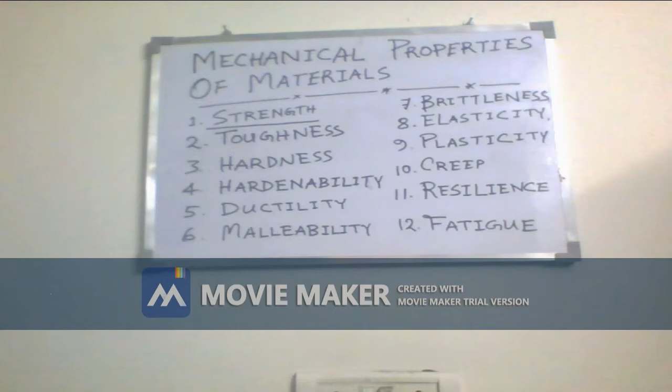So at first we have to know about strength. What is strength? Strength means the property of a material by virtue of which the material can oppose the deformation or breakdown of itself in presence of external force and load. This sentence is very lengthy, so in short, how can we remember it?

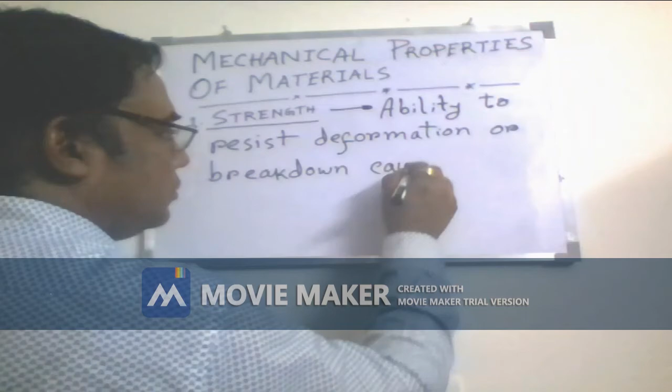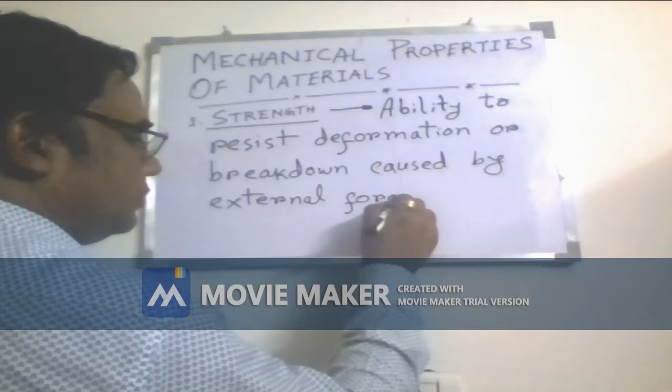To keep in mind, or for easy remembering, we can explain the term strength in a short way: ability to resist deformation or breakdown caused by external force. That means when a material is subjected to an external force or load, it will not be deformed and it will not fail.

That means before applying the force, the shape of the material, and after application of the force, the shape and size of the material will be the same. That is called strength. So we can say a material has great strength when, due to application of external force, nothing will be changed: its shape, size, looking and appearance will be the same as before application of the force.

So our next property is toughness. What is toughness? It is the ability of a material to absorb energy and get plastically deformed without fracturing.

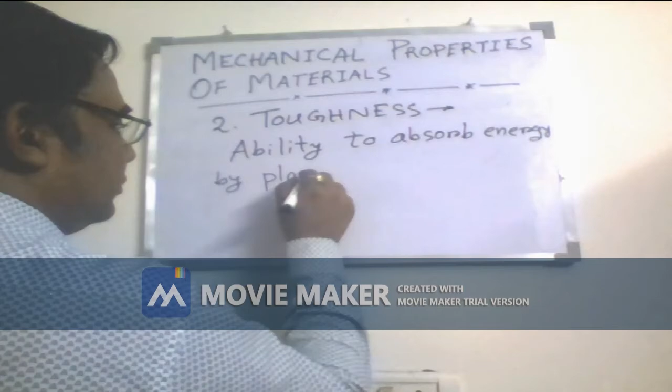And it is mathematically expressed as energy absorbed per unit volume. That means, to keep in your mind, how can you express the meaning of toughness? That is: ability to absorb energy by plastic deformation and without fracture.

That means we can say a material has toughness when, due to application of external force, it will absorb the force and be plastically deformed. That means its shape will be changed, but it will not be fractured.

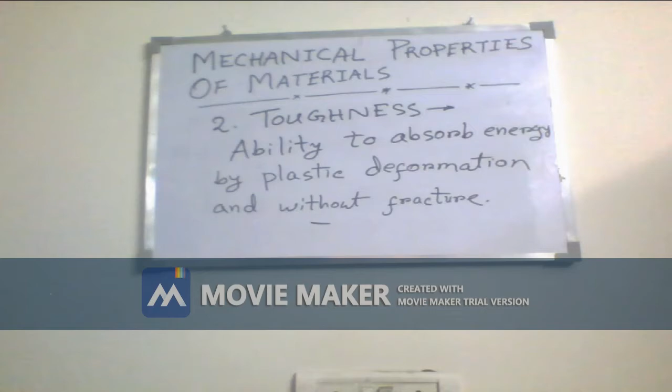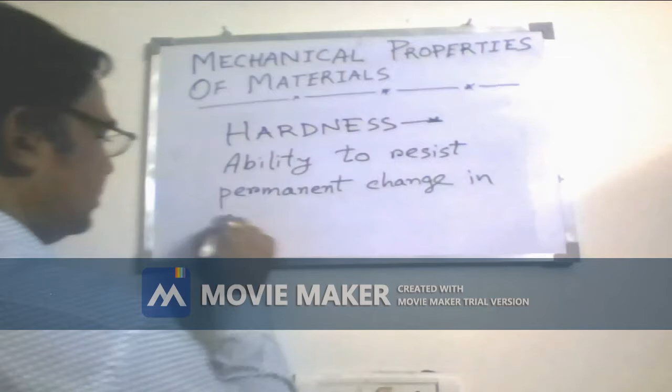So our next property is hardness. What is hardness? Hardness is the ability to resist permanent shape change due to external stress.

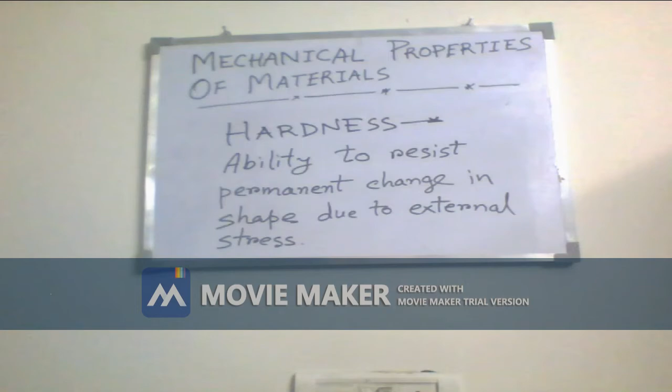So when we apply external force on a material, it can be deformed, but when permanent change in shape does not take place, we can say that the material has hardness.

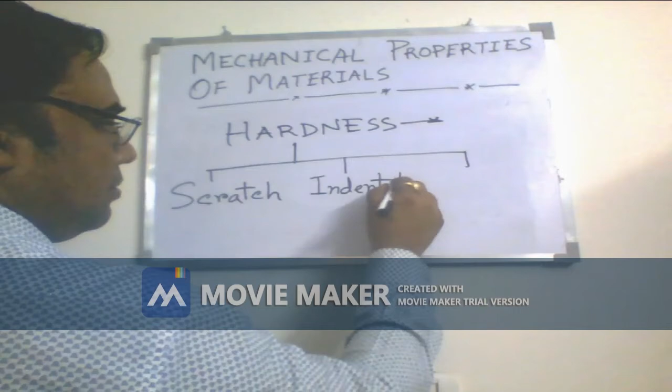Now there are three types of hardness: scratch hardness, indentation hardness, and rebound hardness. So what is that?

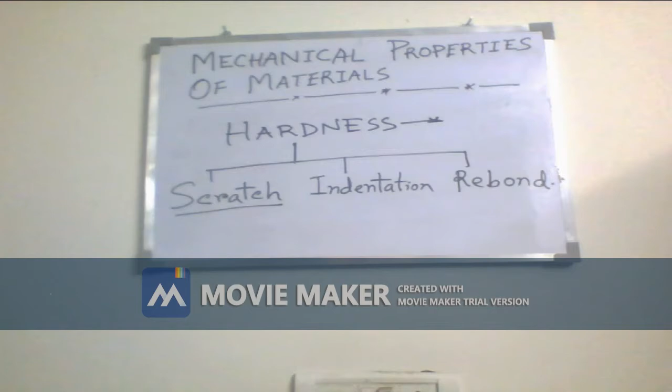At first we will discuss scratch hardness. Scratch hardness is the hardness by virtue of which a material can oppose scratches to its outer surface layer due to external force. That means we can graphically demonstrate it.

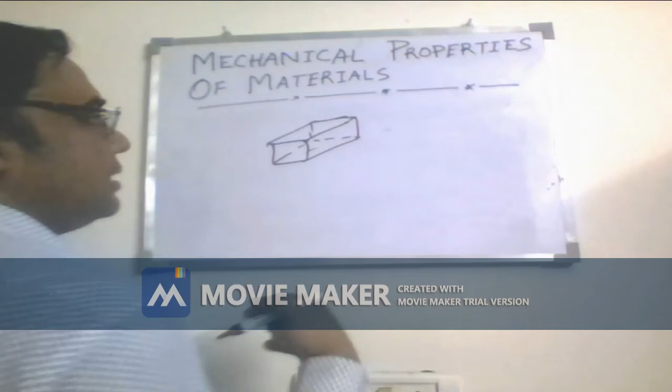Suppose this is a material, and when another harder material rubs on its outer surface, what can be the result? There will be a scratch made by the harder material. So when a material resists this scratch, that is called scratch hardness. If scratch hardness exists in a material, then another material cannot make any scratch on its outer surface.

The second type is indentation hardness. So what is indentation hardness? Indentation hardness is the ability to oppose the dent due to punch of external hard and sharp objects.

Suppose this is a material, and that is a sharp object. If the most sharp point strikes at this point, there will be an indentation like that. The material will deform due to the strike of this sharp point. So the ability to resist this type of indentation is called indentation hardness.

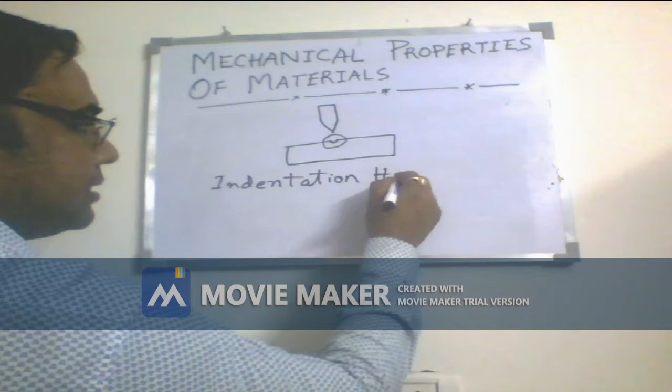Our next point is rebound hardness. So what is rebound hardness? Rebound hardness is the...

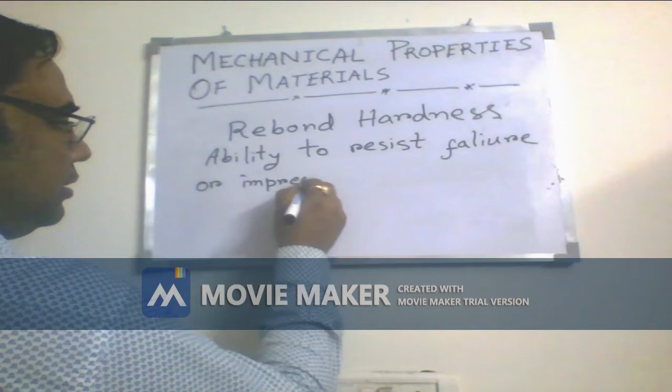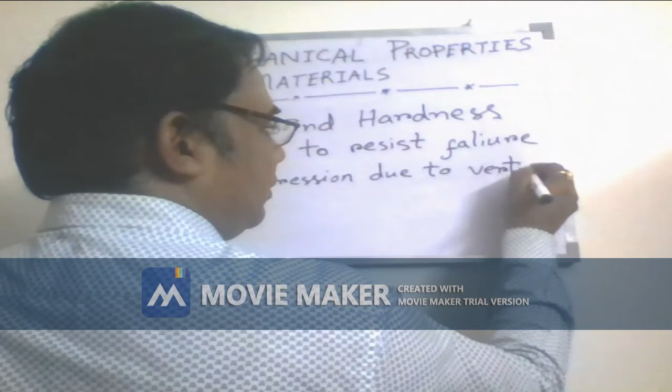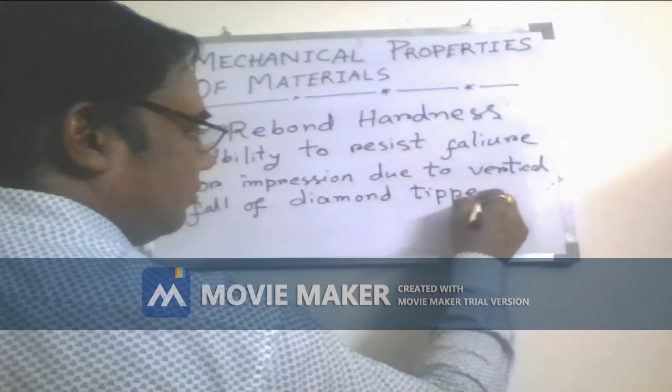Rebound hardness is the ability to resist failure or impression due to vertical fall of a diamond tip hammer on the material.

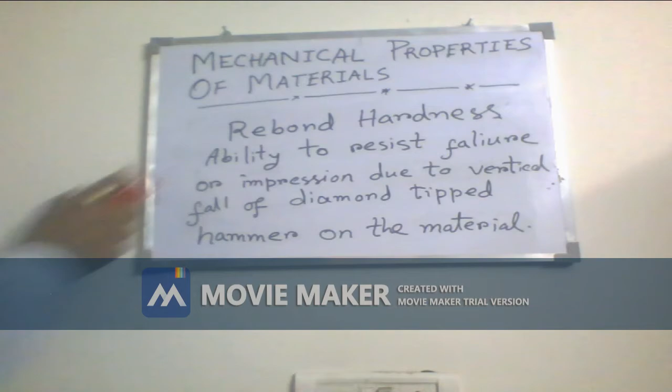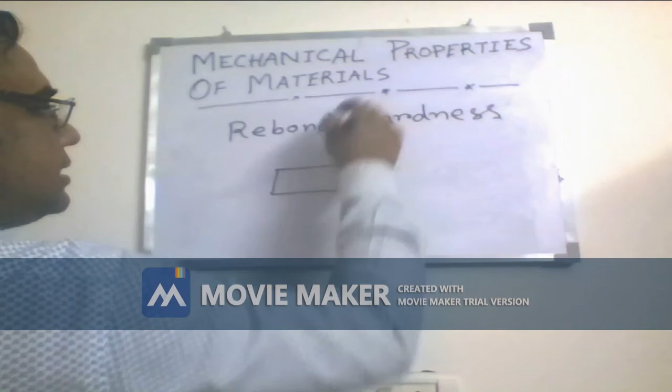That means, if this is a material and suppose this is a hammer, and this hammer is continuously bouncing on the material, if at the point the hammer strikes again and again there is no change in shape and size, or no impression due to the strike of the hammer, then we can say the material has rebound hardness.

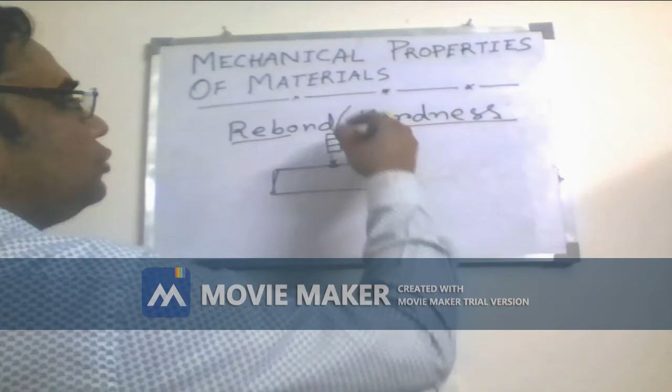So how can we express the rebound hardness? What is the maximum value of rebound hardness? Actually, we know that energy will be proportional to the height of fall. That means the more the height, the more the force.

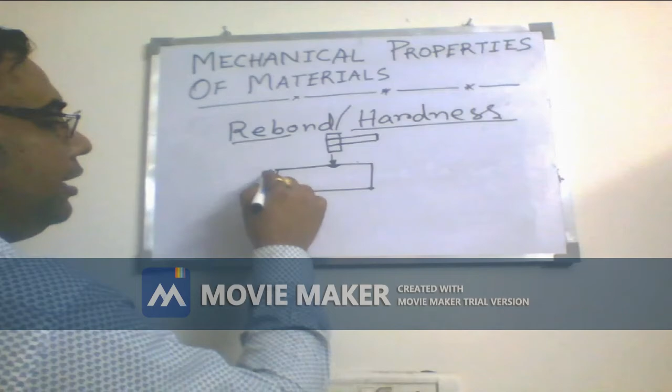So rebound hardness in a material will hold up to a maximum height, and after that there will be an impression in that material. This rebound hardness is determined by the maximum height from which the hammer can fall on the material without making any impression. That is the main key point of rebound hardness. Beyond that height, as the hammer falls on the material, it will be plastically deformed. That is called rebound hardness.

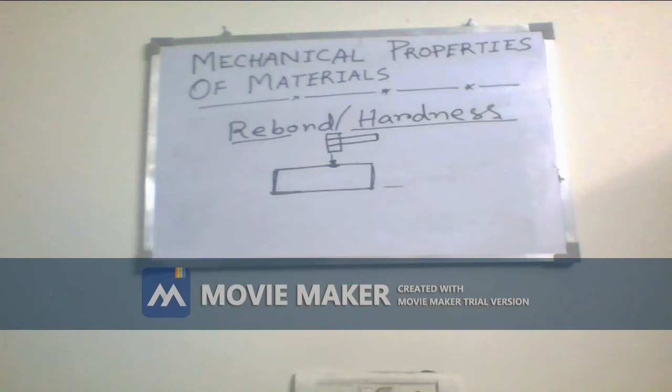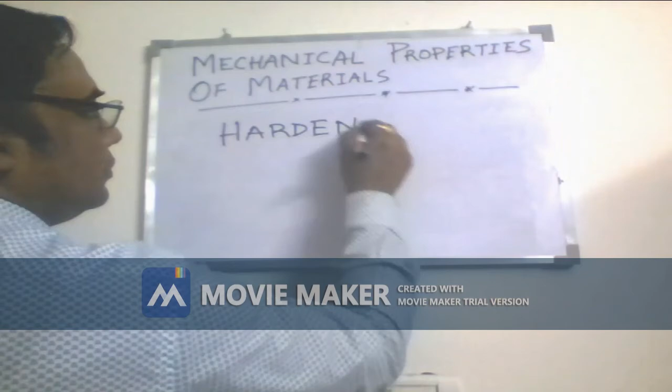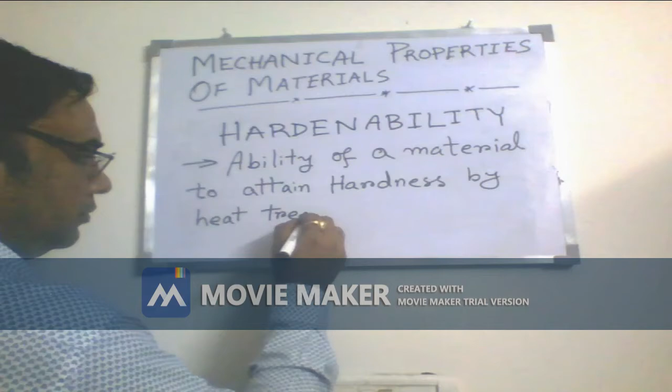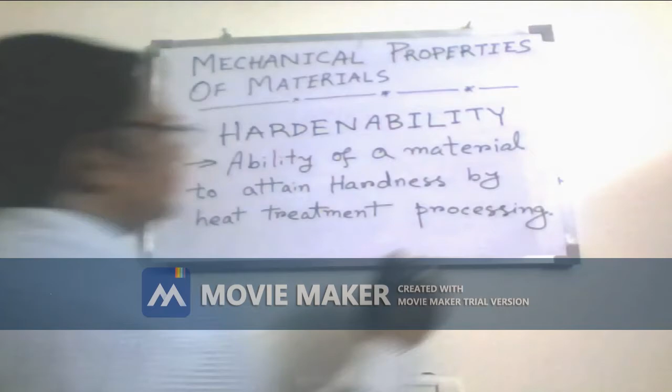Our next point is hardenability. Hardenability means the ability of a material to attain hardness by different heat treatment processes. That means we have to apply heat on a material to bring it to another shape and size from its original size.

So by applying different heating and cooling processes, the hardness of a material can vary, it can go up and down. This property is called hardenability of a material.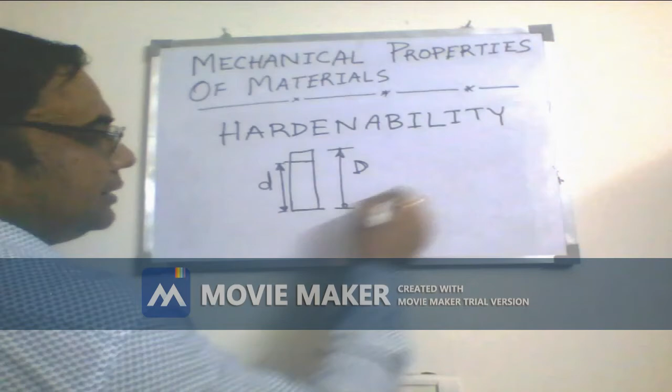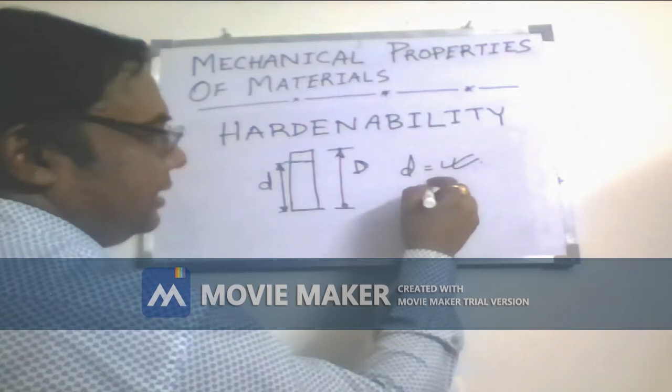Hardenability can be expressed as the depth. That means, suppose this is the depth of a material D, and if we apply different heat treatment processes, it can be hardened. Suppose it is hardened up to this level, from this level to this level. So this measurement, suppose small d, the hardenability of this material is small d, and its unit will be meter, centimeter, millimeter, etc.

Our next point is brittleness. So what is brittleness?

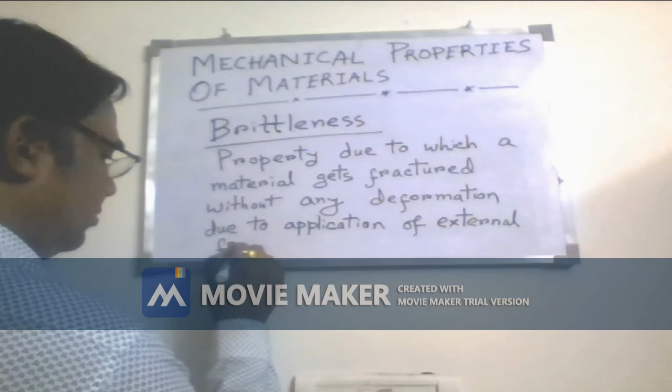Brittleness is the property due to which a material gets fractured without any deformation due to application of external force. So due to brittleness, when we apply an external force on the material, there will be no deformation, there will be no change in shape. The material will directly fail and break into two or many parts. That is called brittleness.

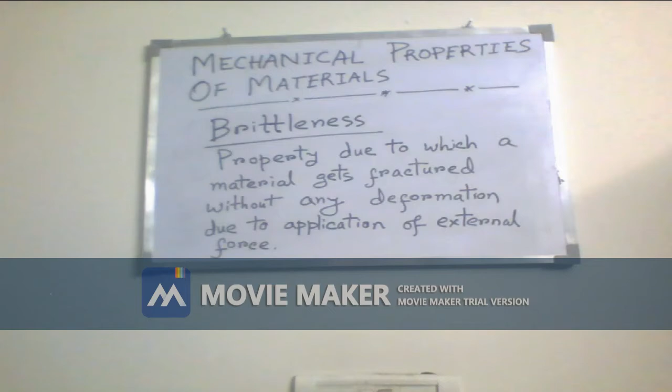Our next property is ductility.

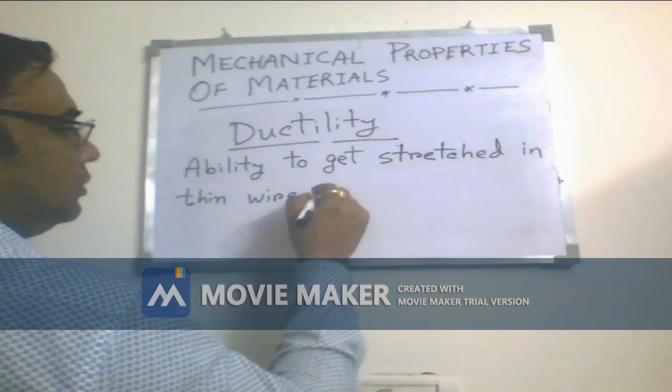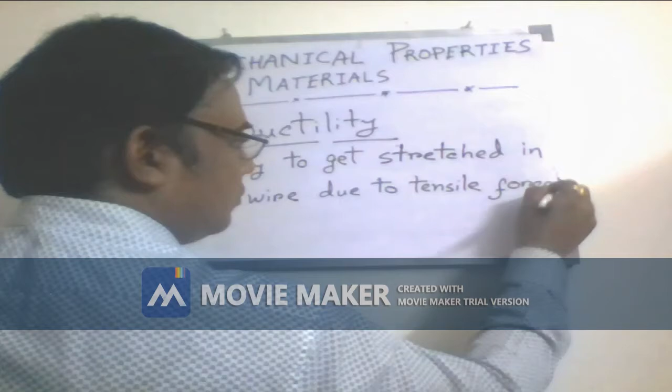Ductility may be defined as the ability to get stretched into a thin wire due to tensile force. I will give you a graphical demonstration of ductility.

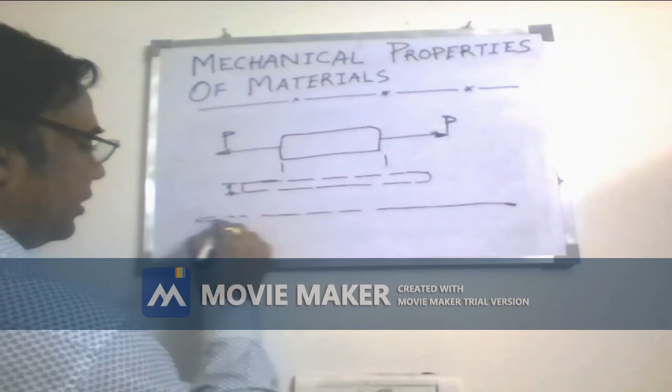Suppose that is the material, and if we apply tensile force, the force that tends to pull the object, what will be the result? Suppose the force is P. As a result of this tensile force, the material will get length greater than its initial length, and its width will become smaller than its initial width. That means length will be greater and width will be smaller. Gradually, due to the application of force, it will get shape like a thin wire. This property is called ductility of a material.

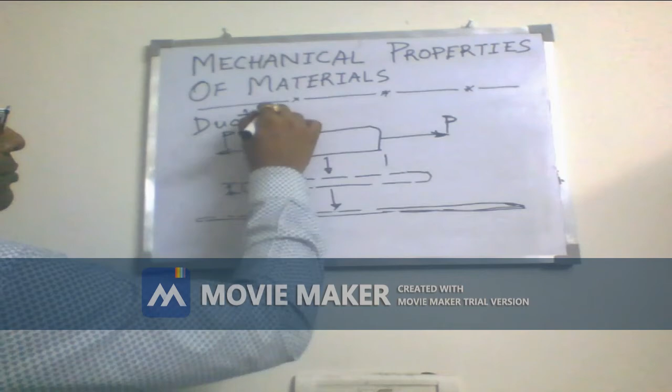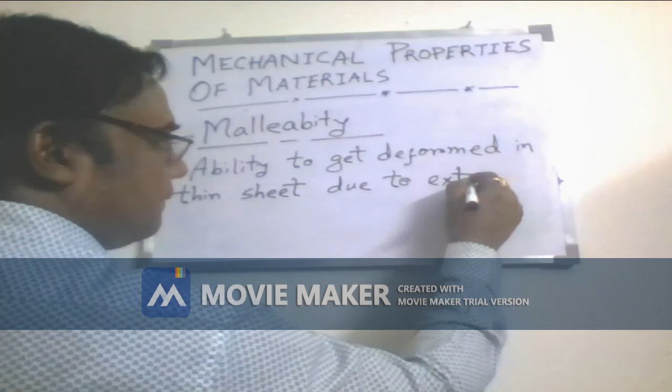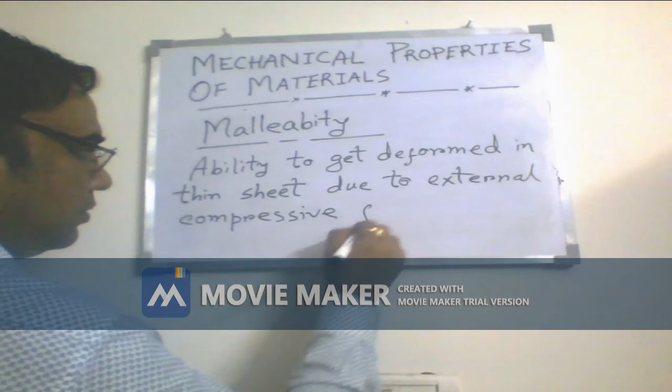Our next point is malleability. So what is malleability? Malleability is the ability to get deformed into a thin sheet due to external compressive force.

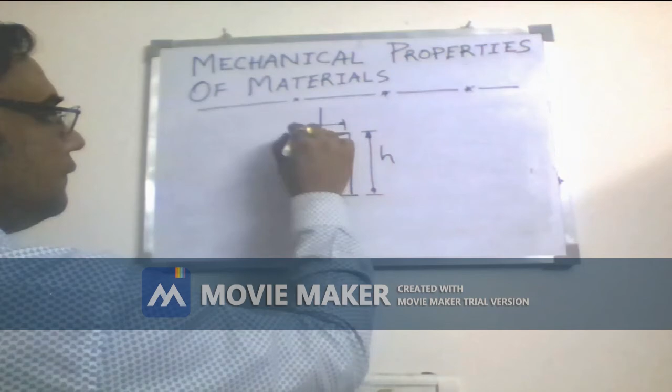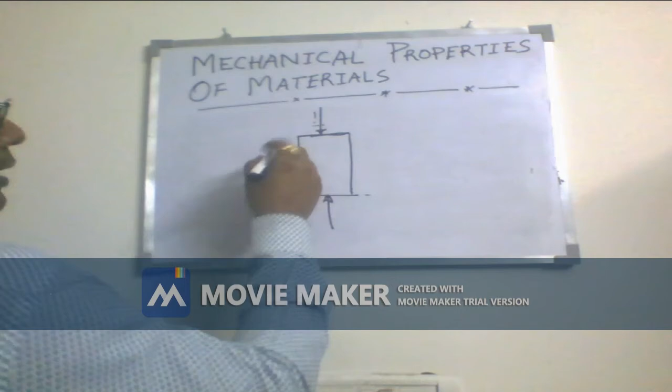Now I will give you the graphical demonstration. Compressive force means the force which tends to compress a material. Suppose that is a material, so we can compress this material from these two sides. What will be the result? That is the height of the material and that is the width of the material. As a result, what will be its shape? It will be lower in height and greater in width. Finally, its shape will be like this.

So our next property is elasticity.

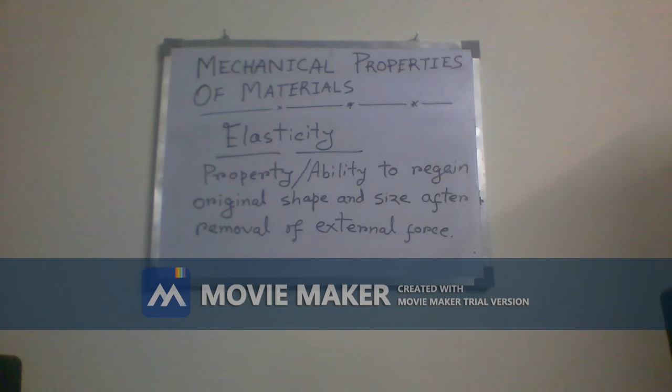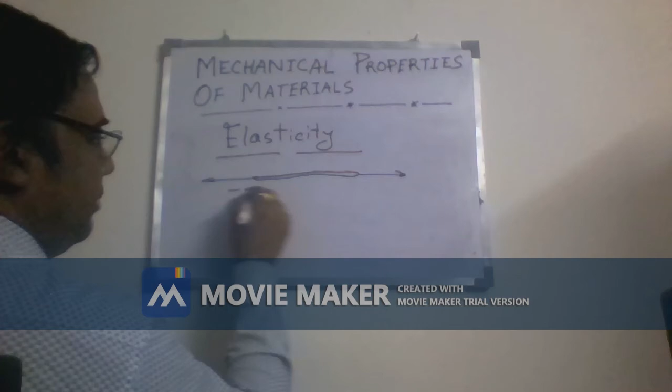Elasticity means the property or ability of a material to regain its original shape and size after removal of external force. So if we give a pictorial demonstration, in our daily life we use a rubber band. Suppose that is the rubber band. If we apply tensile force, the rubber band will be extended in its length. But after removal of this force, it will again return back to its original shape and size. This property is called elasticity.

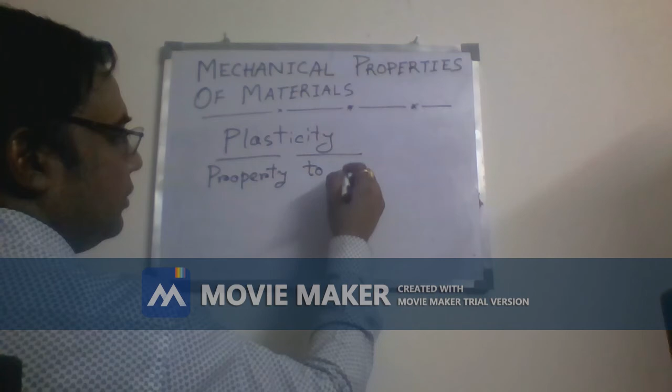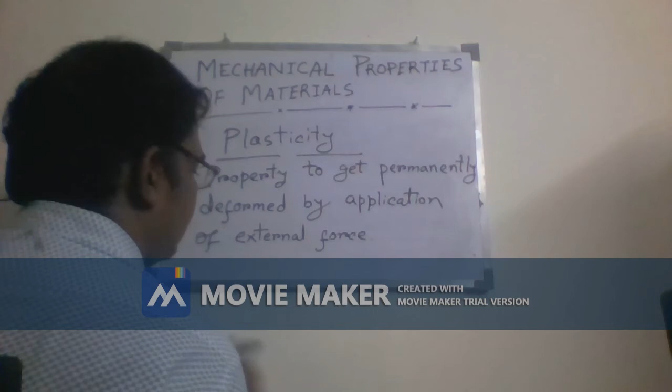Next is plasticity. Plasticity means the property of a material by virtue of which it can be permanently deformed by application of external force. That means after removal of the force, it cannot regain its original shape and size.

That is called plasticity. Our next property is creep. So what is creep?

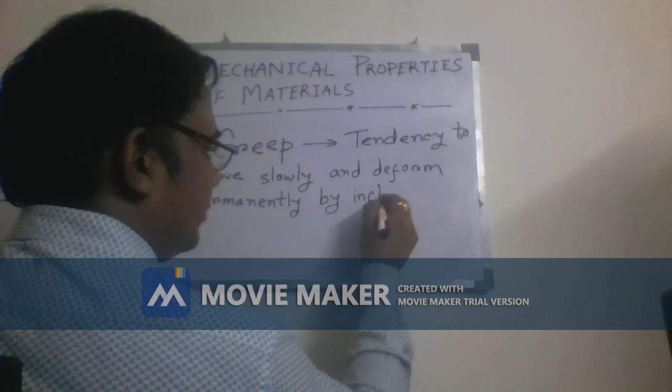Creep is known as the tendency of a material to move slowly and deform permanently under the influence of external mechanical stress. That means, by the property of creep, when we apply any external force on a material, at first it will not get permanent deformation or failure. At the point of application, the force applied will gradually weaken the material, and the weakness of the material will gradually increase. Due to this weakness, after application of the external force, it will deform permanently. This property is called creep.

Our next property is resilience.

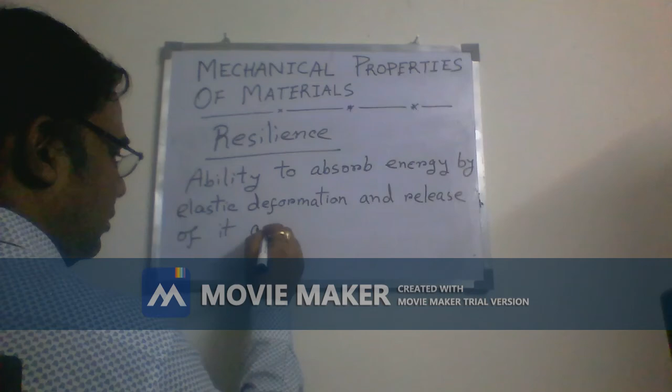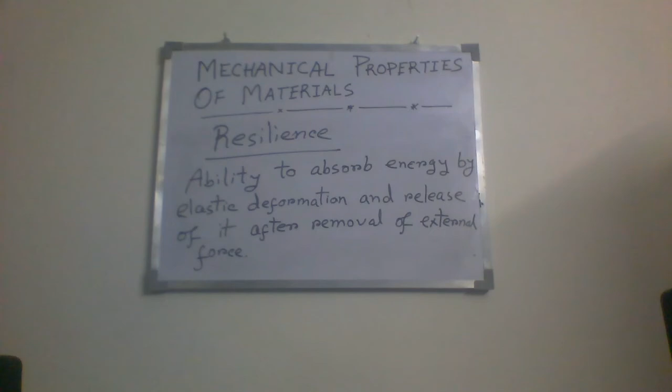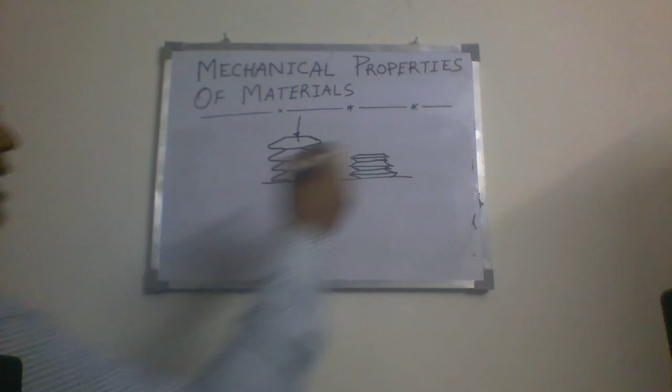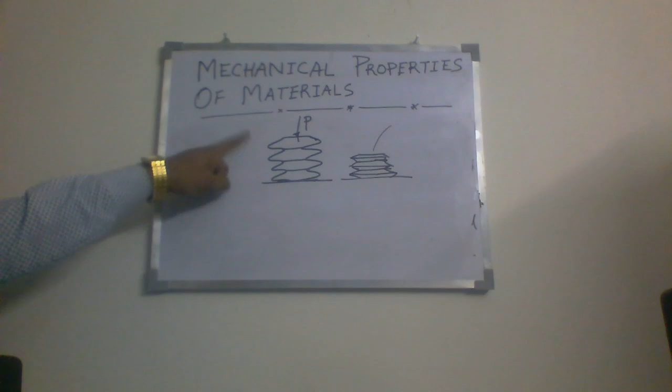Resilience is known as the ability of a material to absorb energy by elastic deformation and release this energy after removal of the external force. If we want to clear our concept about resilience, the one and only ideal example in our practical life is a spring. Let me give you the pictorial demonstration. Suppose that is a spring. If we apply compressive force on it, it will be deformed and compressed, but this compression is elastic. That means after removal of the force, it will again return back to its original size. The spring is an elastic material in our practical life. So when it is compressed due to the application of this compressive force, it absorbs the energy, and after removal of the force, when it regains its original shape and size, it releases the energy. This property is called resilience.

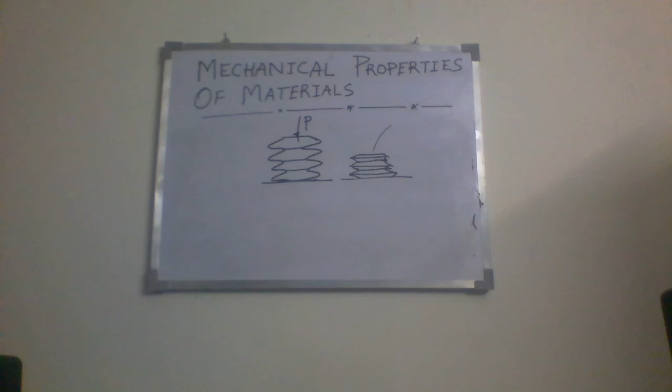For today, our last topic is fatigue. So what is fatigue? Fatigue is the weakening of material caused by repeated loading of the material.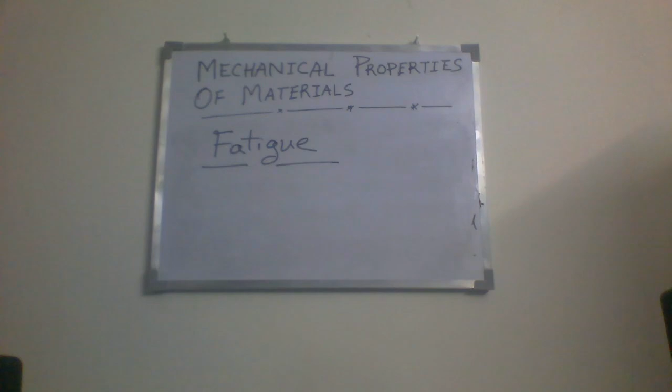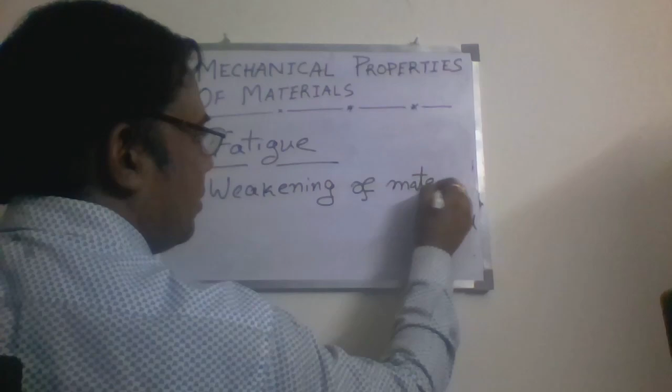When a material is subjected to cyclic loading greater than a certain threshold value but much below the strength of the material, microscopic cracks begin to form at grain boundaries and interfaces. That means fatigue means the weakening of material by repeated loading, that is called fatigue.